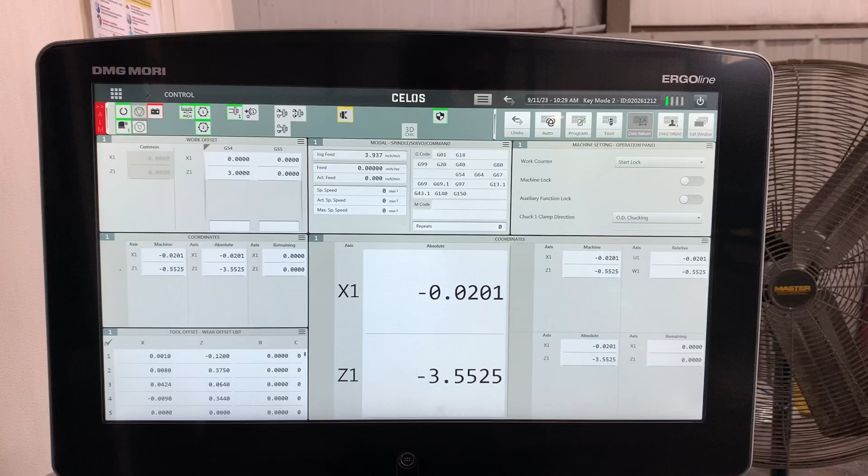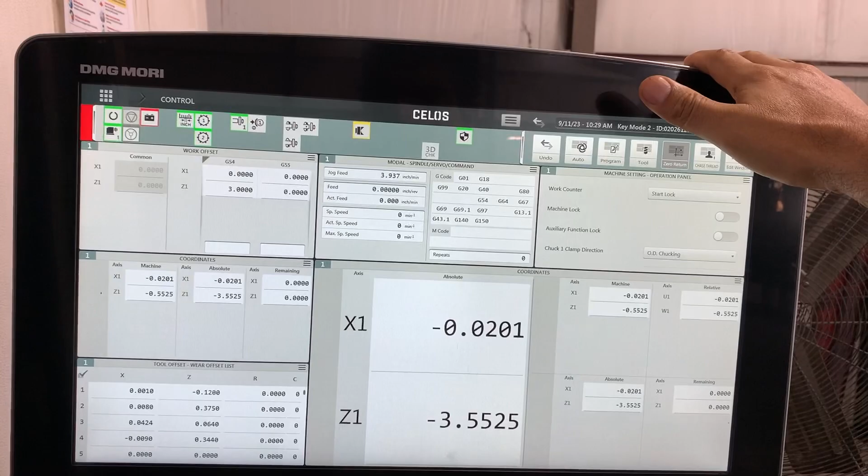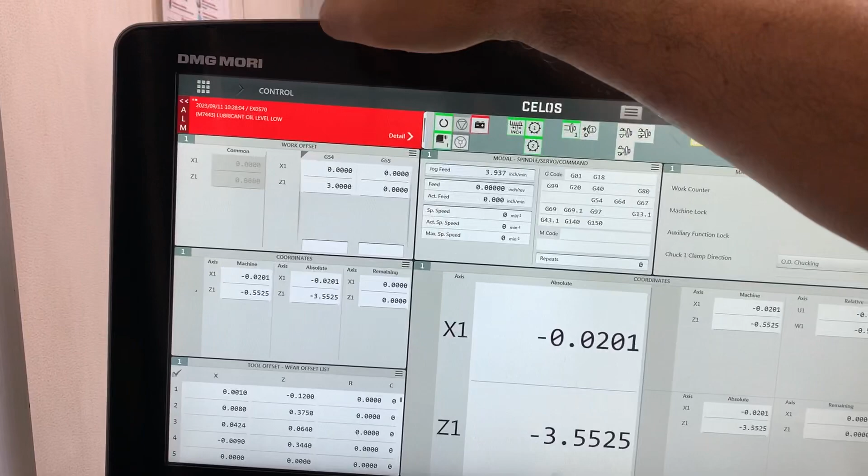We're gonna see how to check the alarm history, and we have the alarm on the left upper corner, and I open the menu to see the description of the first alarm that is showing us.

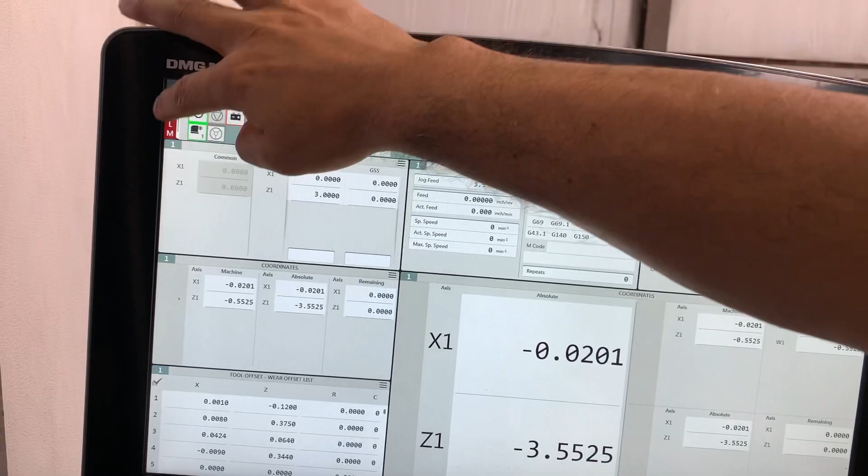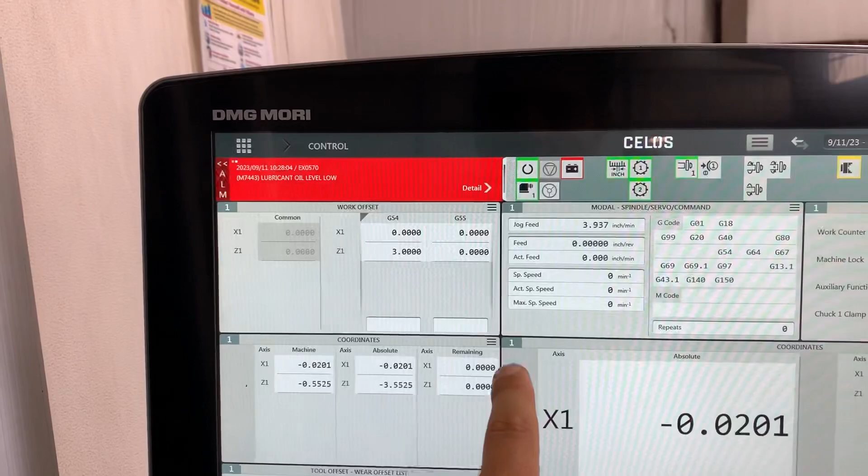Let me check this. There you go. So now we are gonna see the details. And in the details, let's press reset.

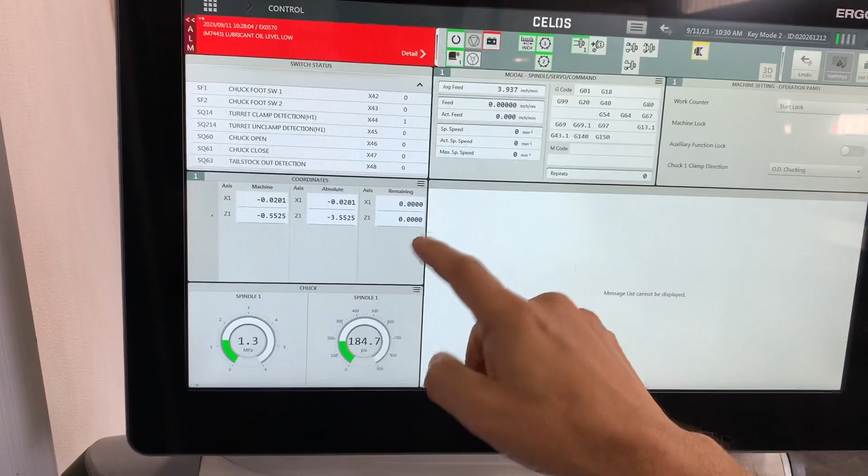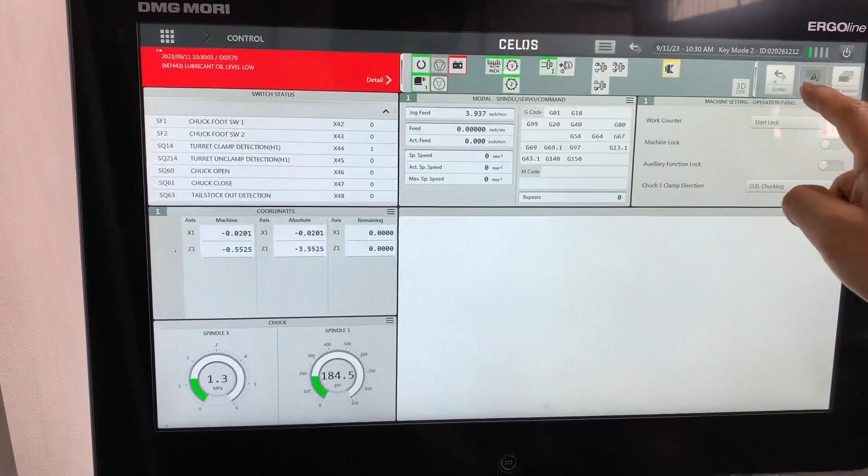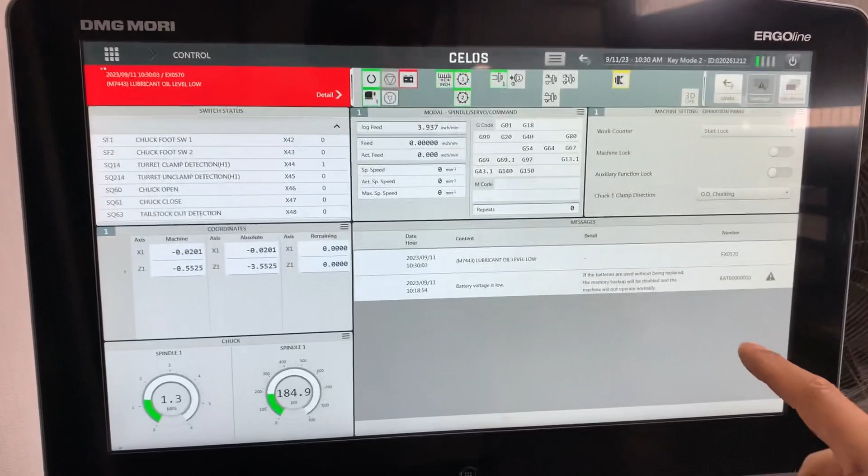And for some reason it's not showing us. There you go, I had to undo the command here. And we have a lubricant oil level low, and the warning that we have here is the

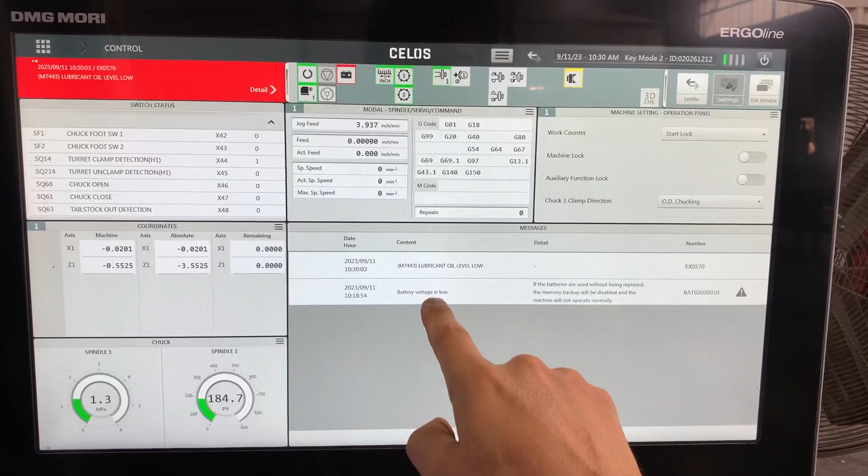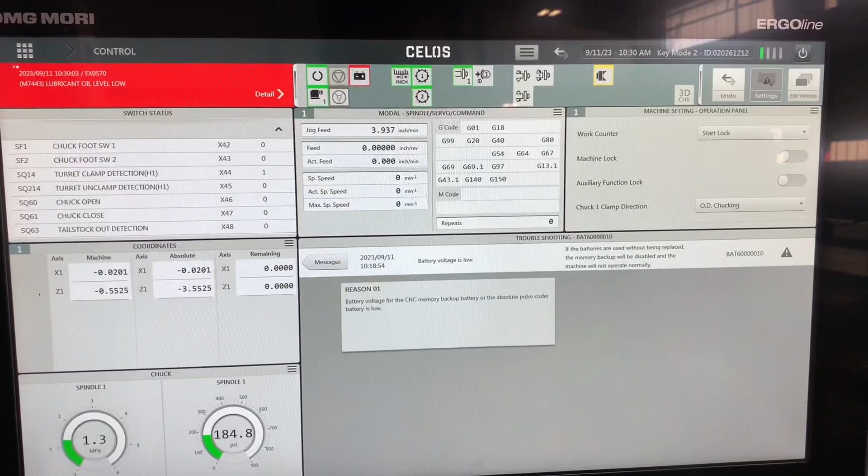battery low, voltage is low. And let's open this, and it's telling us that the CNC battery memory backup battery is low, so we need to replace that. And let's check more details.

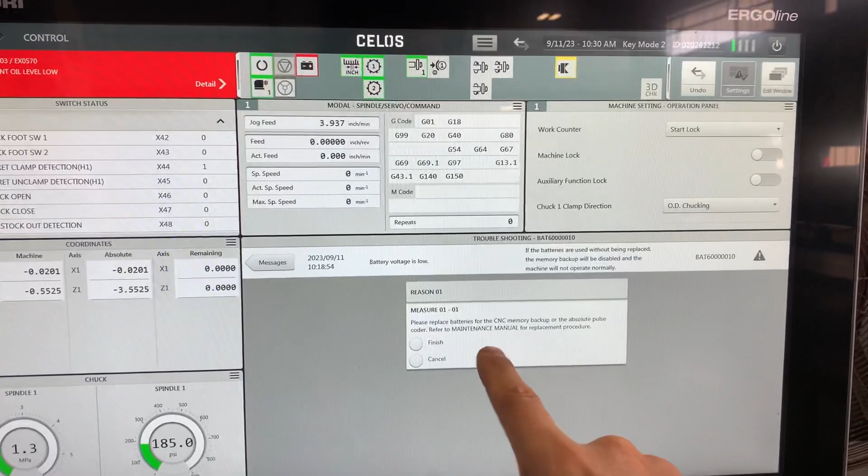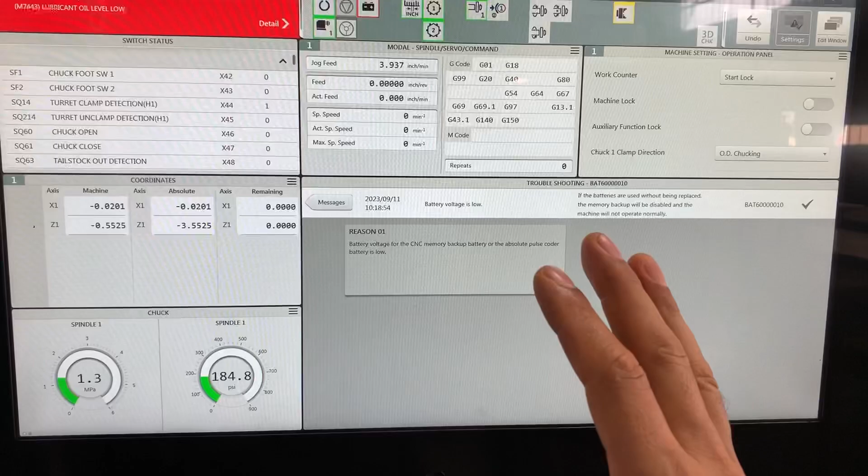It says that please read the maintenance manual for the replacement procedure. So if you don't know which one is the procedure, you might need to check the manuals right here.

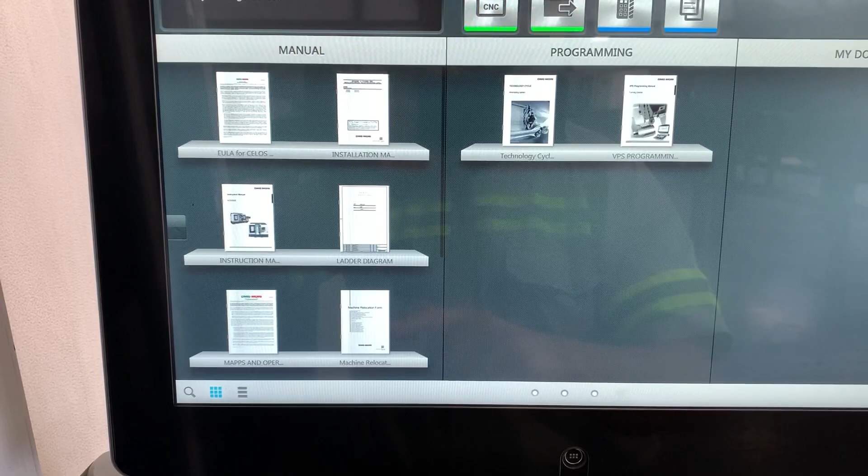And then we have the instruction manual, and in here you can check. We don't have the keyboard right here, but we can open it from this icon.

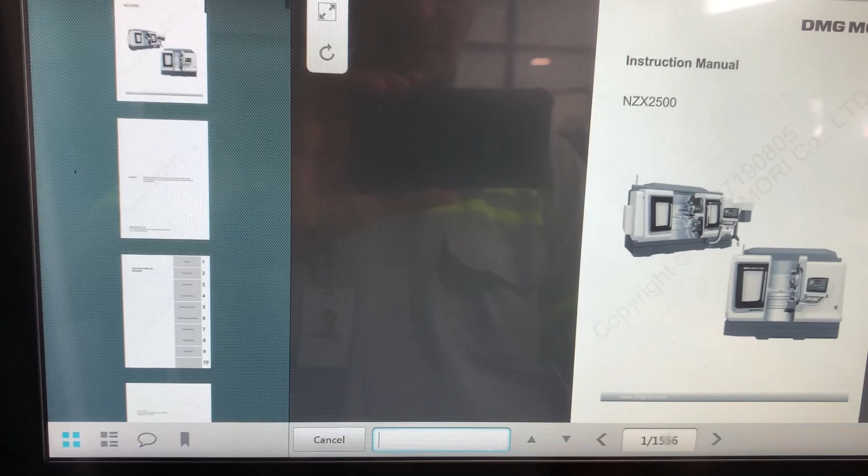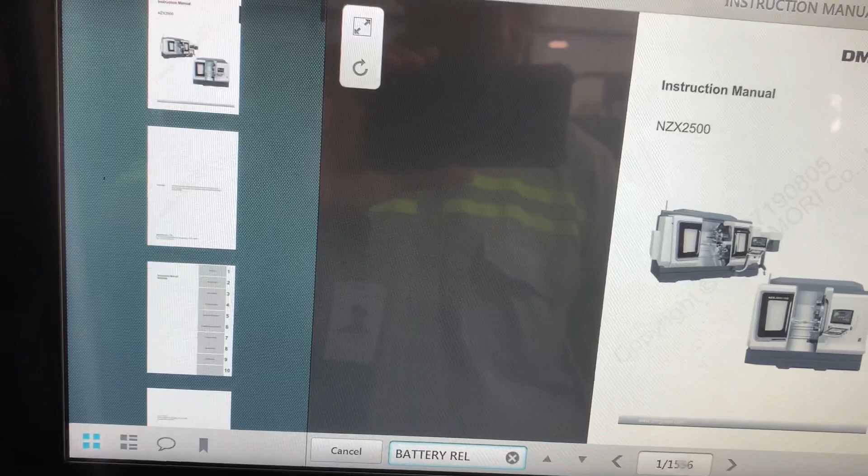Enter battery replacement. Let me go back, space, replace. Let's look for that, enter.

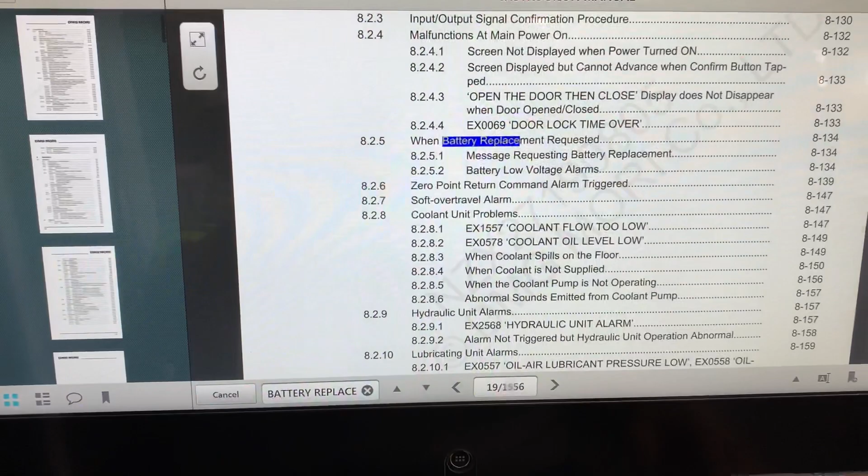So we have the procedure in chapter 8.2.5. Let's keep searching.

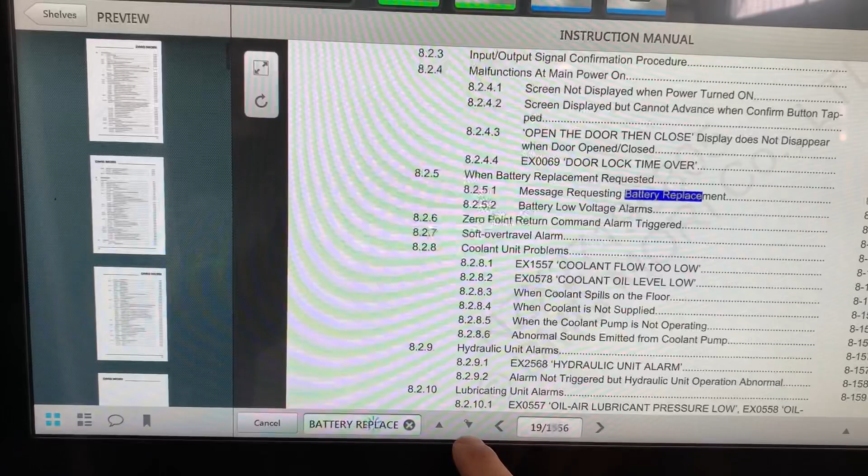And here is the procedure.

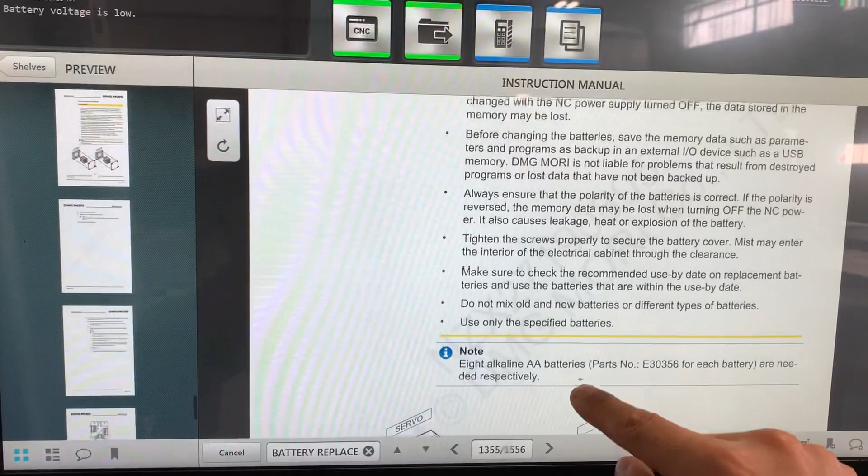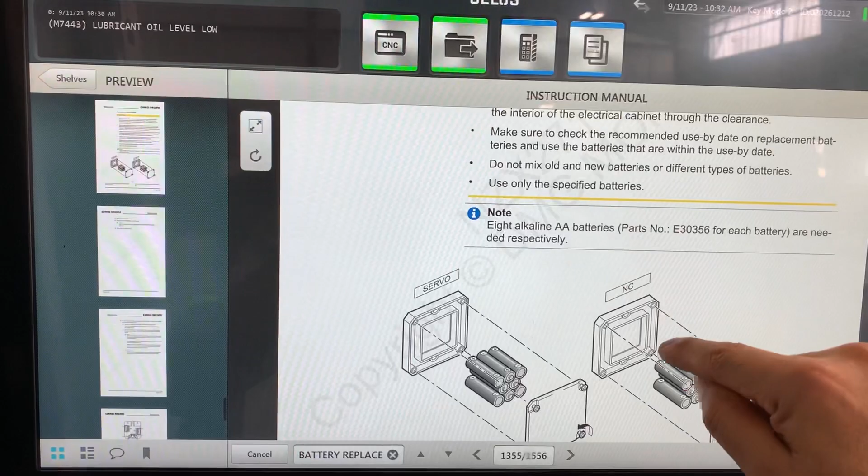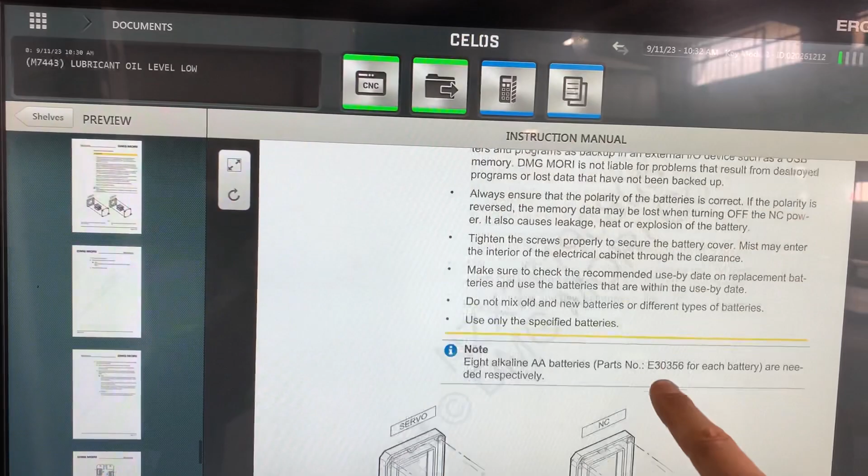So for the CNC battery, we need alkaline AA batteries, and it's gonna be the one that is identified as NC. But in this case, we're gonna change both of them, and you need to have the machine

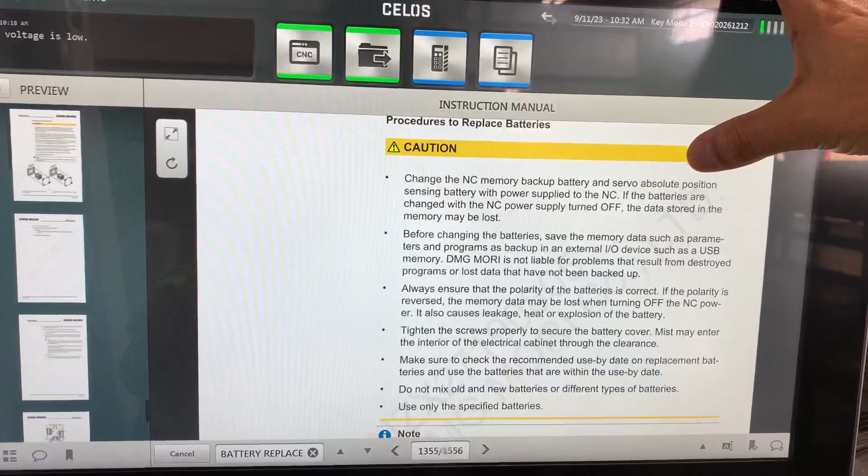change the NC memory backup battery and servo absolute position sensing battery with the power supply to the CNC.

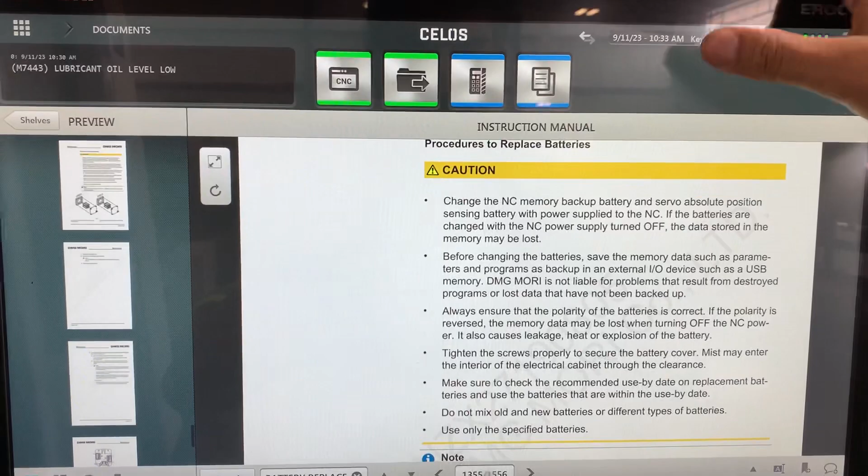Okay, so we need to keep the CNC on. Some CNC need to be off, but in this case it needs to be on. So if you turn it off and you change the battery, you are gonna lose the parameters or data from the CNC. So let me show you where these batteries are.

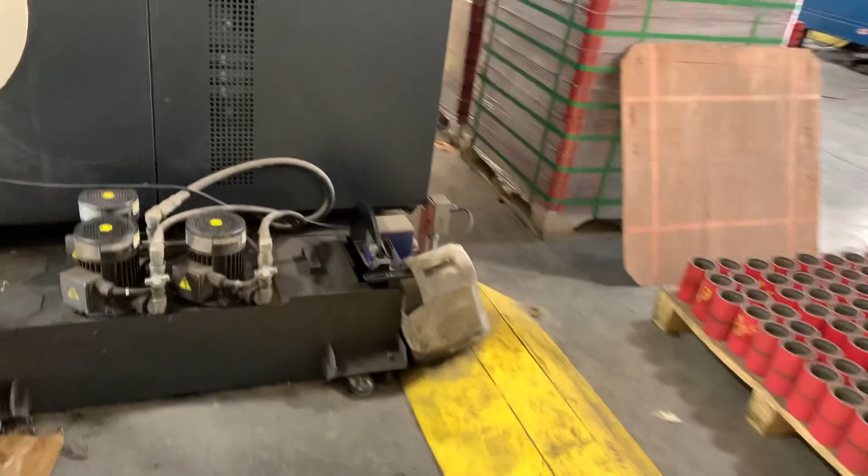So we have the batteries for the CNC right here. We need to remove this cap, and the servo batteries right here. Okay? Thank you.